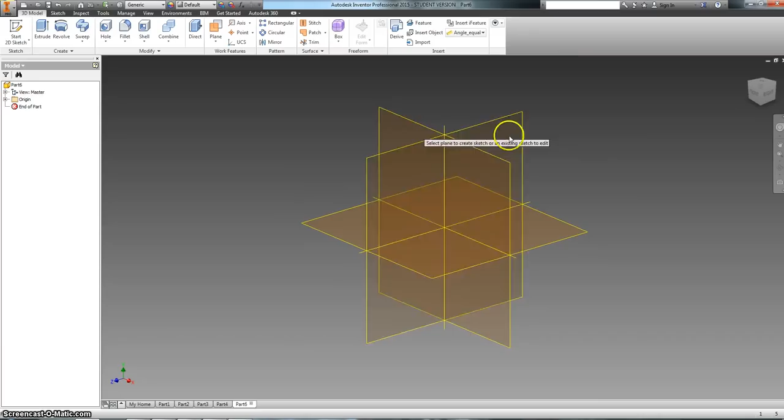From here, I'm going to go up to Start 2D Sketch, and it's going to give us those 3 planes of existence. Remember, we're always using the XY plane only because of the 3D printer. So I'll click there and it gives us our little grid.

Looking at the drawing, this is the part that we're trying to make. As always, the easiest way to go about this is to visualize this as a block of clay. We want to start with the outermost dimensions and then cut away the pieces that we don't need - it's always going to be the easiest way to do it. So I'll take a look at the overall length, which is 4.5, and the overall height, which is 2.5.

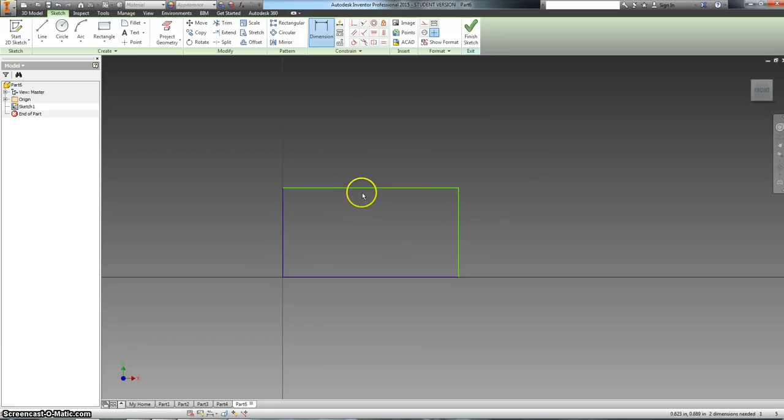I'm going to go back to Inventor and use my rectangle tool starting at the origin. I'm not making anything to size just yet because we're going to use the dimension tool to tell the program it needs to be 4.5 inches long. Let me zoom out, and 2.5 high, 2.5.

That is our front view of our object, but we cannot add depth in this. We need to actually finish the sketch - you see it goes into that 3D view. I'll zoom out again, and we're going to hit Extrude.

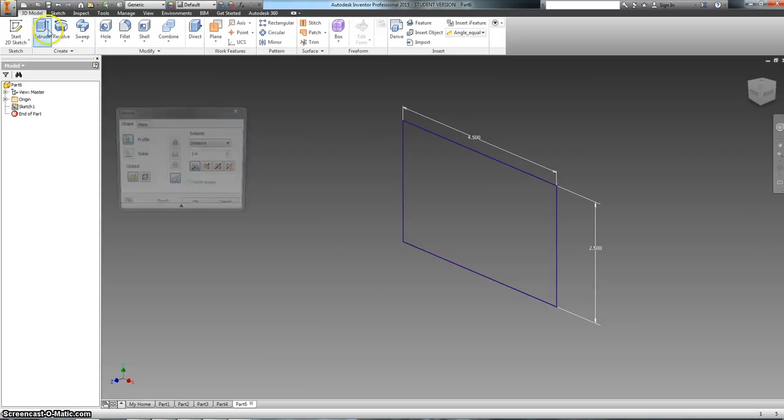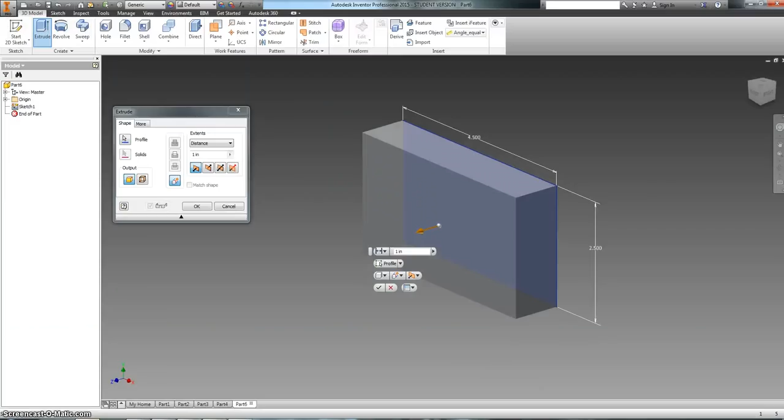Remember, it automatically chooses our profile because it's literally the only one that it can extrude at the moment. Looking at the drawing, using these as references, you can tell that it's 0.5, 0.5, and 0.5, which adds up to 1.5. So I'll go back and change our depth to 1.5 and then hit OK.

So we have our outermost block of clay. Now we need to start taking away the pieces. Looking at the drawing, I'm going to start with these angled surfaces here, and I can tell that they are 0.75 high and 0.75 as a width.

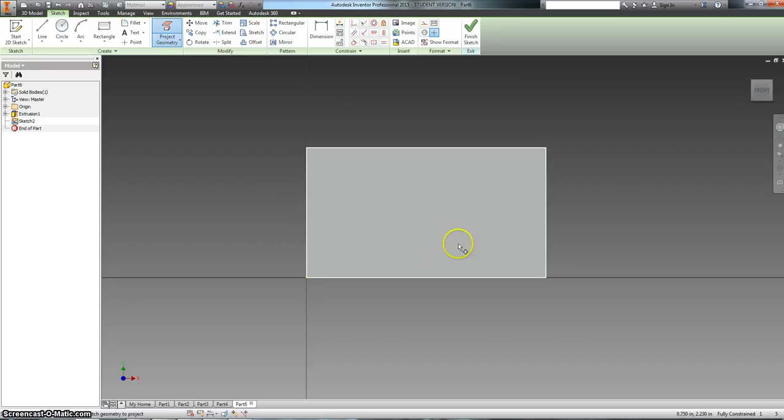So I'll go back to Inventor. I'm going to do it from this side. I'll right click and hit New Sketch. From here, it's always easier when you're first starting off a sketch on a side to use this tool up here, called Project Geometry. When you click it, it asks you to click on a surface, and when you do, it projects all of the lines of that object onto the plane.

So if we go to our isometric view, you can see a little bit better. Now everything's highlighted in yellow and we have lines we can connect properly. Going back to our front view, I'm going to use the line tool to create those chamfered edges. I'll click 1 and 1, and then go from the bottom to the top here.

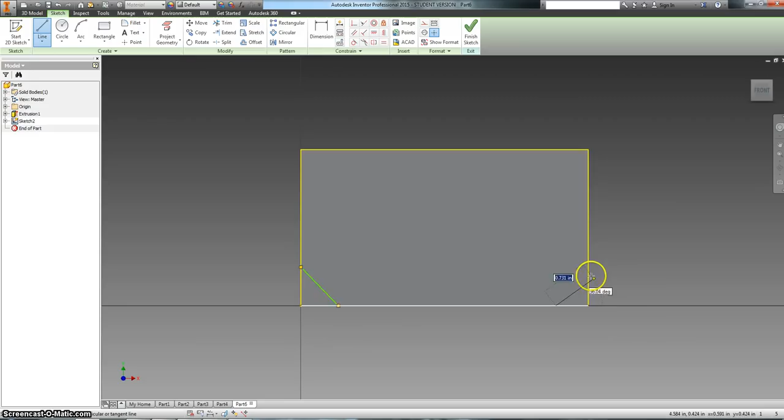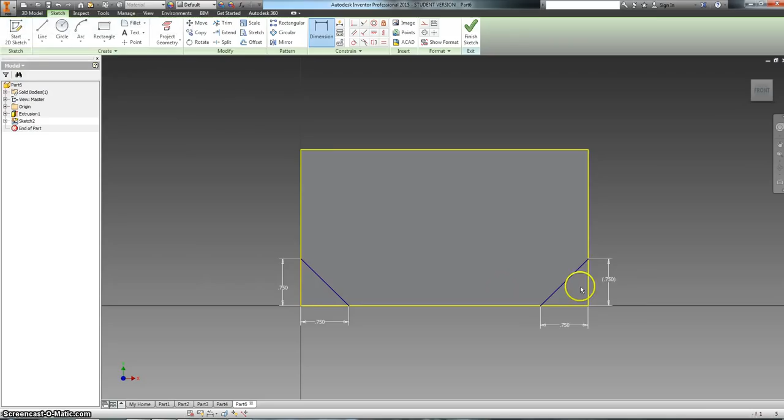Notice they're not even close to what they should be just yet, and that's because we need to dimension them. I'll hit the dimension tool. I know from the top of the line to the bottom of the box needs to be 0.75, and from this point of the line to the side of the box also needs to be 0.75. This needs to be the same for both, so I'll do that again over here: 0.75, and from the bottom to this point of the line is 0.75. Looks like they were already constrained together, which is good.

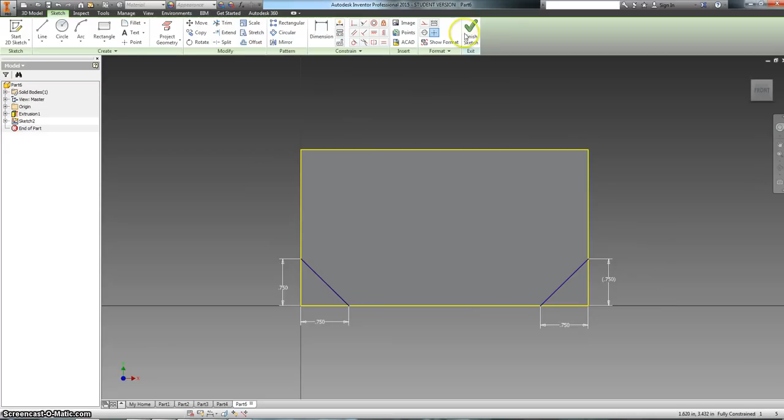Just a note, if you were to try and do a dimension from the bottom to, let's say, this edge, it's not going to give you any type of measurable distance except for in degrees, and that is not what we want. Although it does end up being 45 because they're both 0.75 away, that is not what we're attempting to do. So I need to extrude these - I cannot do that in sketch mode. I'm going to hit Finish Sketch, and then hit Extrude.

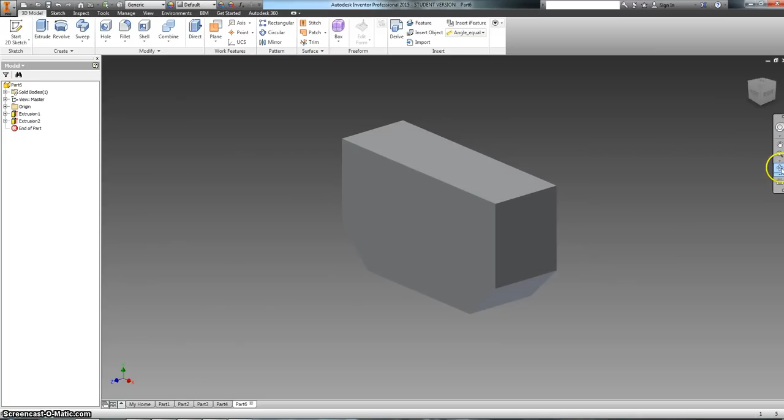I can actually select both of these extrusions at the same time, it just saves you a little bit. But we don't want to add material like it's doing right now - we want to, in fact, cut. So I'll hit Cut here, and it's still set to 1.5, which is actually our depth, and that's great. So I'll hit OK, and as you can see, we have our chamfered edges, our angled edges on the bottom there.

Now the last thing I need to do for this object is to create this trench. You can do this 2 different ways: you can draw on the side view and cut all the way over, or you can draw on the top view and cut a little bit down. So I'm going to go ahead and do the top view there.

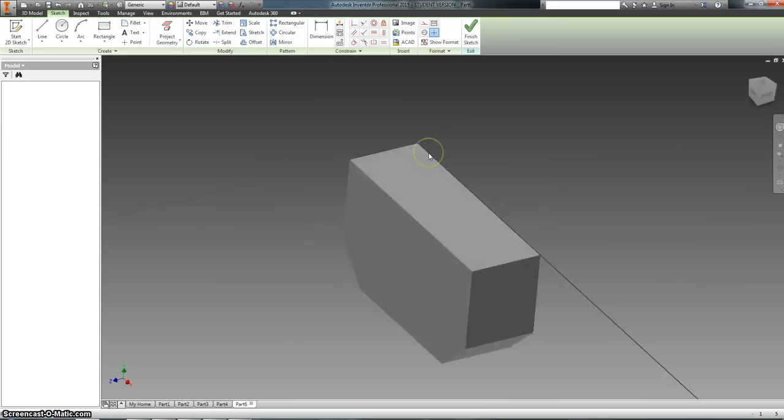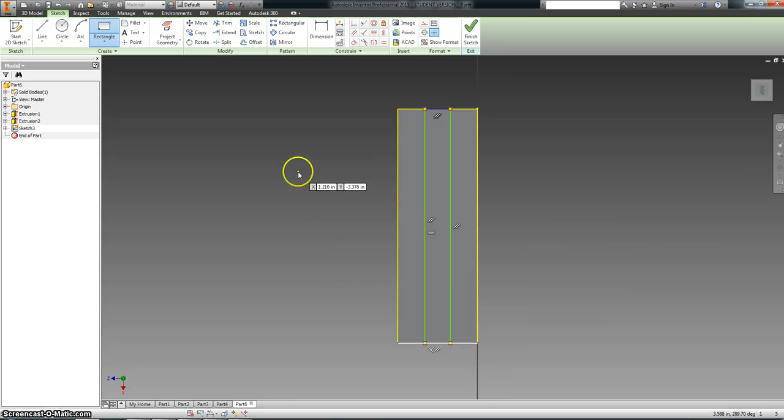So if I right click, New Sketch, it pops up for the top view here. Just like the other one, I'm going to hit Project Geometry - this allows us to draw those lines nice and neat on the edges. Instead of wasting my time doing 2 lines down, I can actually just use the rectangle tool. Start at the top and go all the way down, making sure it snaps to the edge of the object there.

From here, it almost looks pretty good as is, but we need to make sure that it's exactly what we want. So I'll hit the dimension tool. From the side to this side of the rectangle, we want that to be 0.5. The rectangle itself is 0.5, and just like in the extrusion cube, if we attempt to dimension this one, it's going to give us that error message.

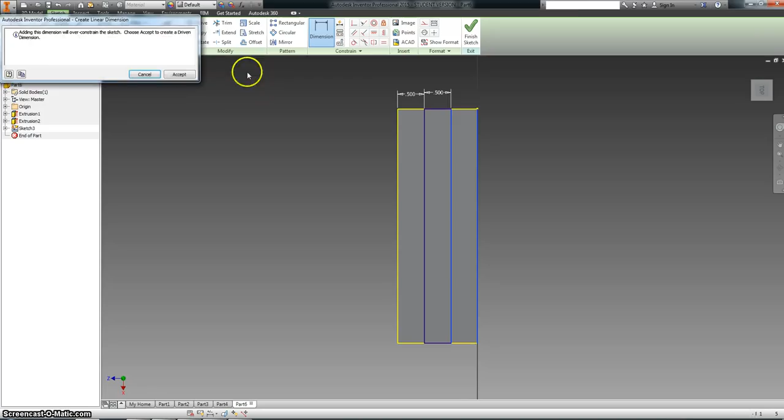This is because the entire depth is 1.5, and if this is 0.5, this is 0.5, this has to be 0.5 - it cannot be anything else. So I just hit accept, and it puts it in parentheses for us.

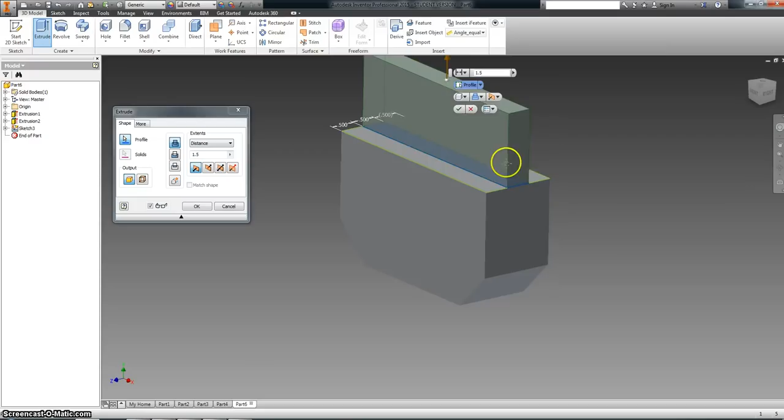I'm all set, I'm ready to extrude, so again I'm going to hit Finish Sketch, and use the extrude tool to click on that profile. Now again, we do not want to add any material, we in fact want to take it away, and this ends up being too long, so we're going to go ahead and change it.